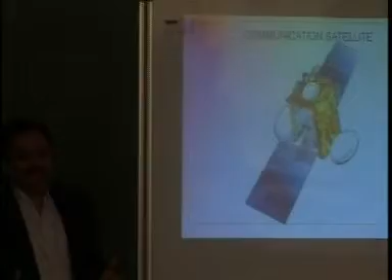Even when we say we have made the antenna very compact and very highly efficient, still the demand is so challenging that they want more, and they say don't put only 3, put 6, 8 like that, and it has been reality. Whatever I am saying is the reality. People are putting that.

Now antenna, when we talk, we say for all the frequency bands from UHF to Ka band currently ISRO is working on, and KU band, you are probably aware that we are working on DTH - everybody's house has one DTH antenna. UHF is for tactical purposes, even our defense people or sailors are using it.

And L band is for navigation, again the way I said, the GPS satellite - the L and S band is being used for that application. And they have their own merits and demerits in terms of their utilization.

Now another is the application - airborne application, ground terminal, remote sensing and communication - because the frequency spectrums are defined for these applications. The airborne application for SAR is already predefined. When they talk about high power radar, the signal power is so high compared to the level of signal which you receive in a communication system.

Can somebody answer how much power generally your DTH system in your house receives at the terminal, at the output where you are getting a low band signal? It's hardly, maybe... few milliwatts. Imagine - if somebody's radar is there in the same frequency band, its side lobe itself will be of the same or maybe more than this power.

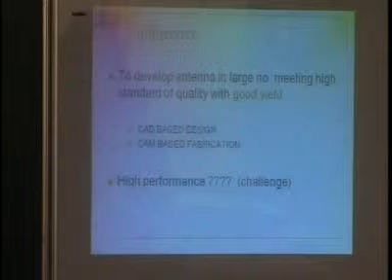And now I will talk about the design aspect first. Whenever a designer has to design any antenna, what is the prime thing he has to do? He has to use the CAD design tools which are available with him, or select them depending upon the application he is working on.

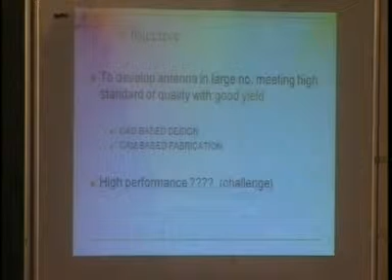And he has to meet a very high quality of yield. This means he should not go for any repeat failure, and the rejection should be as low as possible, and the cost of fabrication should be very low. Because if you have a very good design, it may meet the specification, but the mechanical fabrication can be so high, the tolerance requirement may be so high that the cost goes up.

So the designer's requirement is to design an antenna with high performance with low cost. Cost always comes into the picture. And high performance means what? This is the antenna design.

This is your condition going to become like this - if you're going to have low volume, low weight, you need to have low cost, low cross polarization. Everything should be best, and that's everybody's goal - shaped pattern, beam to beam isolation should be as low as possible. We should have multi-band, multi-frequency. So it should have all these performances, meeting all these performance requirements.

Then he has to compromise on what he should do and what he should not do.

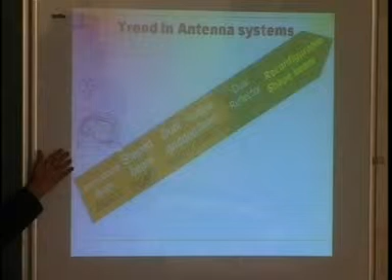Now I come to the next slide. What is the trend now? The trend is, you know all these requirements, and just for your quick reference, I put three different types of reference. Now these are the conventional antenna which we used to have earlier, unshaped beam. Then we moved to shaped beam. These are all reflector antenna - I am not talking about array, I am talking about reflector.

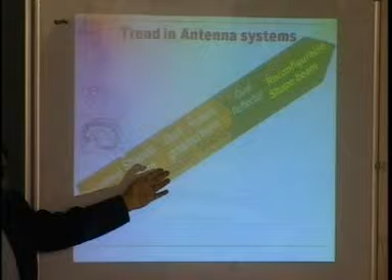Then we have dual gridded, which I will talk about a little later. The multiple beam which I was talking about, the EDUSAT type of program where we need to have more number of beams from a single antenna.

Then dual reflector technology, then reconfigurable shape. I want to reconfigure because the satellite life itself is a minimum of 8 to 10 years, and whatever requirement I have today may change after 5 years. So I should have adaptive reconfigurable antennas. That's how reconfigurable shaped beam antennas is still one topic we are working on. It can be achieved both by changing the reflector surface profile using smart material, or by using an adaptive array, which is well known but has its own problems.

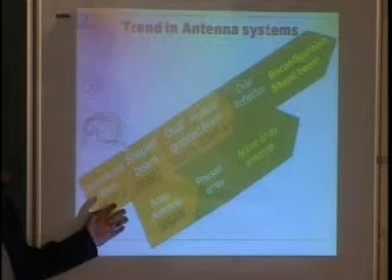Then we have array antenna, phased array antenna, and active array. Today these three are working hand in hand. During the radar era, people were more focused on reflectors, but today a balance is being struck between array antennas and reflector antennas. Why? Because technology for both low power and high power devices in a miniaturized size is now available, so we can use this for phased array applications.

Now comes the scanning beam. Sometimes we have a scanning beam requirement, where you want to scan the beam over an area, for example across your border areas. In terms of theta and phi, they are predefined, and you want to scan the beam at the rate the user wants. This type of requirement needs scanning beam antennas. For a ground station antenna, you would go for mechanical scanning, which is not easy to implement on a spacecraft, so you have to go for a different type of technology.

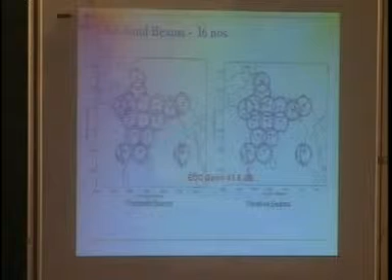So this is what I was telling you, the 16 beam is being planned for now. The advanced communication satellite is going to come up in another 2 years, where we are covering even Andaman, Maldives, and Lakshadweep. And this will be the scenario when we are talking about 16 beams.

Whenever we talk about any beam, we talk about its application in both transmit and receive. In each beam, both transmit and receive capabilities are there. And in each beam, you should be able to isolate one beam from another, because the user sitting here should not get interference from a signal overlapping from elsewhere.

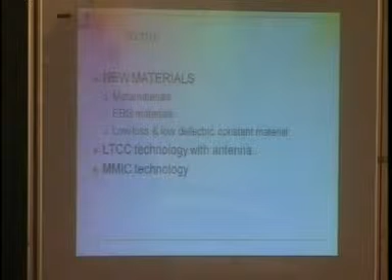Now what is the trend? This is just the need I told you about. The trend is, we know we need reflector technology, we need phased array technology, but there's a very important point which we've seen nationwide in our country: new materials have to be explored.

Why today are we talking about the Chandrayaan mission? Why are we talking about very costly satellite systems being sent for a moon mission? Because everybody is racing to explore new materials, which need to be lightweight, have more stress capability, the ability to withstand conditions, and low coefficient of temperature variation, since temperature variation in space is very high. All these qualities should be there.

And then we are talking about metamaterial, which has become a very important area where we are able to reduce the size of an antenna by changing its property. It's not a natural material; you do something to an existing material to change its property so you can use it for any application. And the most important application is antennas, where size is the biggest problem.

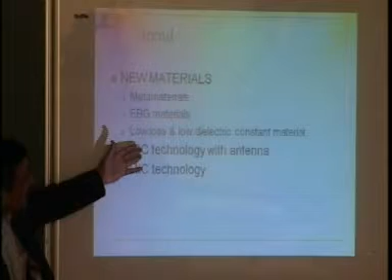Then EBG materials, and low loss, low dielectric constant materials. Even today, whatever material we use for our microwave integrated circuits, we are importing from the US. So we have to develop our own indigenous low dielectric materials equivalent to those being used elsewhere.

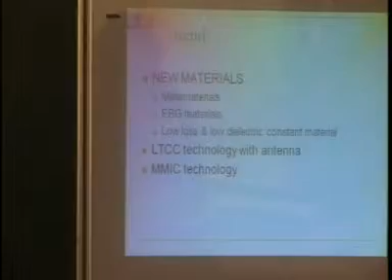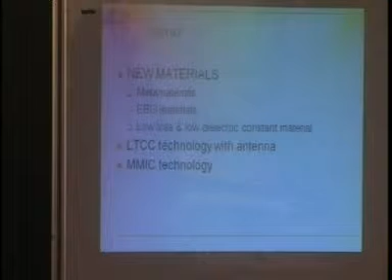And then LTCC technology with the antenna, where we need co-firing of different materials in a multi-layer configuration. It's a new technology. The most important use is when we are packaging the transmitter and receiver along with the antenna—then you need LTCC technology because you can integrate directly. Otherwise, the general conception is antenna here, transmitter here, receiver here, connected either through connectors or cables.

Now technology requires that your transmit and receive system should be in a multi-layer configuration, so that you get directly embedded in a single sandwich. You are having all the three together without any connector, without any cable.

Imagine if you have a phased array antenna system with suppose 200 elements. If one connector weighs 1 gram, you are having 200 grams. You have to minimize the connectors. As the array size goes up, the connectors, the cables, and testing of everything becomes really a headache. So this is the new technology which is coming up.

In India, we are establishing this in 2-3 places. One is Sriharikota and another is in Pune, C-MET, but still a lot of work has to be done. Whatever we are developing, these microfractals or metamaterials, they have to be worked with the technology where we are having high packaging density.

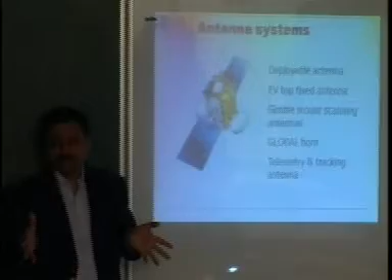There can be deployable antennas - any antenna can be deployed, because in telecommunication it becomes more important, since this whole antenna cuboid, the satellite has to be put into a launcher which has a particular volume. You cannot fly this at full size, so it has to be made compact and folded, and then it gets unfolded. The solar panel also gets unfolded there. That's why deployable antenna becomes all the more important.

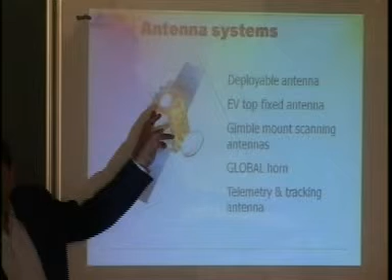And then EV top fixed antennas are there, on the top of this. EV means earth viewing - this top always looks towards the earth. That's why it's called earth viewing antenna, top fixed antenna.

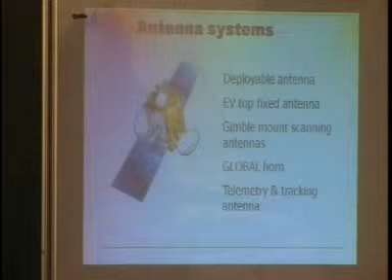Gimbal mount antenna. And then all these satellites, their health is being monitored by a control station always, to see what is happening in the satellite. One is satellite antennas looking towards the user, and the user is getting communication, whatever the application. But the health of the satellite is also very important - what is happening inside.

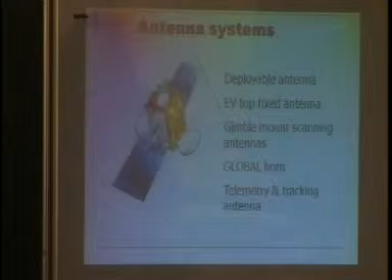So a lot of telemetry data is coming from the satellite to the ground, and accordingly they keep monitoring the temperature, its pitch, roll and yaw axis, whether it is a stabilized platform or it may tumble also. And it may give more errors, and you are wondering why the signal is not coming, and maybe it is looking towards some other region of the globe.

So the telemetry and tracking antennas are becoming very important today in today's world. Why? Because nobody wants to have any failure or loss of signal because of pointing accuracy or tracking accuracy. So tracking antennas are becoming very important nowadays.

Because if you have an antenna on an aircraft that is moving - thank God the satellite is stationary - but if your aircraft is moving, how will the aircraft have communication with the satellite? It can take any type of rotation, even 180 degrees, while it cannot keep its position fixed while moving along for its purpose. So tracking antenna becomes very important.

I will emphasize on that, then I am going to give you some highlights of what we have developed. So whatever I said in the last 20 minutes, these are the trends in the feed. You need high power, wide band, and multipolarized.

This is only dual polarized, multiple polarized. Then we need tracking. How many of you have read about monopulse tracking? I am sure you must have read in radars. Now for tracking, we know monopulse tracking, where 4 horns are being used. That is the old technology now.

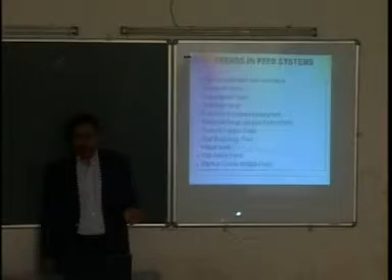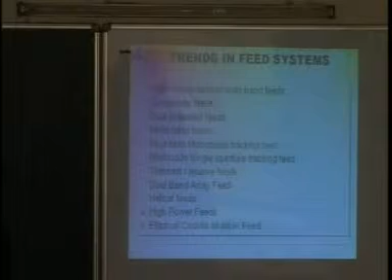People are now using a single aperture, higher order mode technique where they take care that the signal loss is very minimum, the tracking slope is very high, so that with minimum loss you are able to track.

Now, why should there be minimum loss? We always say that any device should have minimum loss. Efficiency should be better - power efficiency, device efficiency. No, not generalized - power efficiency is a different issue. That is what I am saying, loss is there.

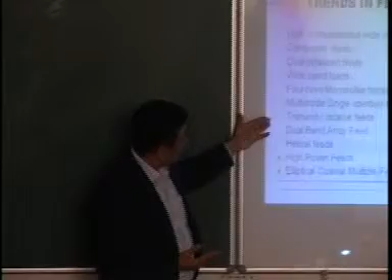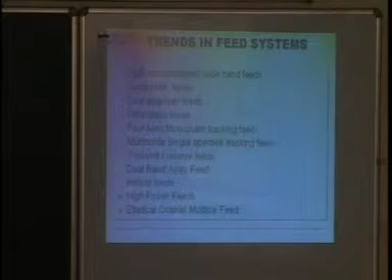Now, what can loss do? Loss means power dissipation. Mismatch is okay, but power dissipation means heat, so heat will be produced. That's the reason whenever we talk about high power feeds, the power dissipation has to be very low. Otherwise, when you have 4 kilowatt power and even 0.1 dB insertion loss, it is going to generate a lot of heat.

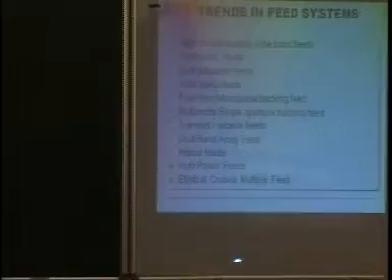Because the loss gets directly converted into heat. Even if my communication system may be able to afford it, I can pump more power, and for gain of antenna I can put a larger size antenna so that my losses are taken care of. But the heat dissipation becomes very important.

Similarly, in antenna systems also, you have different types of antennas. These are reflector antennas and these are what we call phased array antennas.

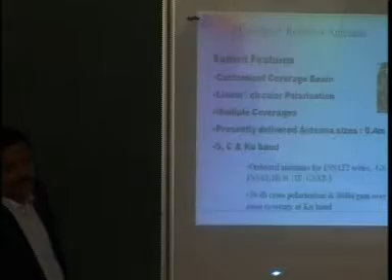Unshaped antenna I will not cover more because you are already aware of this. An unshaped antenna means a simple parabola with a feed, giving a circular beam, and wherever you cut it, you get a circularly shaped pattern - concentric circles.

So these are just to give you a glimpse: this is the reflector and these are the four arms, and these are the feeds kept here. You are illuminating the reflector with the feed and trying to see the efficiency of the reflector. You get around 55 to 60%. You cannot get more than that.

So these are the typical parameters. Generally we get 27 to 28 dB cross polarization. Now what do you mean by cross polarization?

If you want to send a signal in linear polarized form, suppose X polarized signal, the maximum signal should go into X polarization. Nothing should go into Y, which is orthogonal to X. So the minimum signal you send in the Y polarization is the cross polarization signal. Cross polarization should be as low as possible. Ultimately, conservation of energy is there.

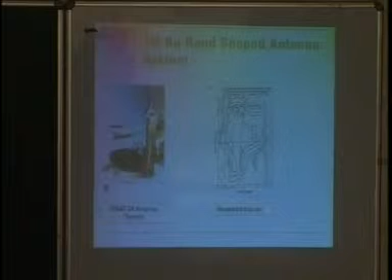These are the measured performance results - we have deliberately put these together. Tomorrow we will discuss how to measure this type of radiation pattern, how you measure it, and what challenges are there.

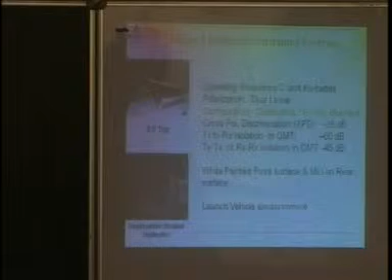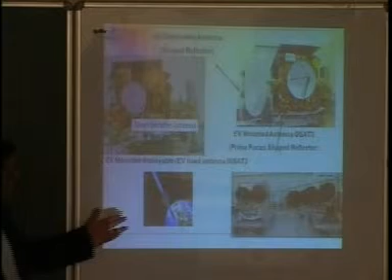Now, in the case of any satellite, you have multiple reflectors. Then you have to worry about these - like you see here, how many? 1, 2, 3, 4, 5... 8 antennas are there.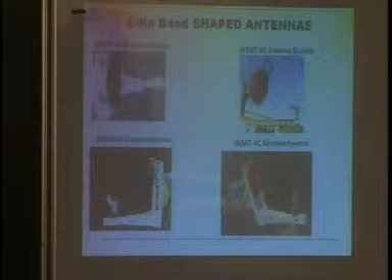Then this is one of our Insat-3 satellites where we have 2, 3 antennas. There can be any number of antennas, and each antenna has to meet specifications in isolation from other antennas, and when kept in that environment where multiple antennas are present, it again has to meet requirements, because there may be interference from adjoining antennas.

Now comes the dual gridded reflector. We have a problem of 30 dB cross polarization, 32, 33 and all that. This is why new technology has come in the reflector antenna system, where you are seeing 2 colors here. These are 2 reflectors placed one upon the other. But you may be wondering how communication can occur, because one is there on the back.

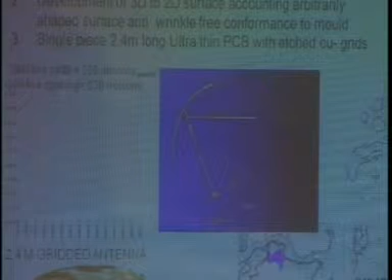The front reflector has grids, and it will allow only one polarization to get reflected, the other polarization gets transmitted through. So this front surface is acting like a polarization filter. That means the cross polarization is going to be very low, because if X gets reflected, the Y polarization is not going to get reflected. It will go and hit the back reflector, and the back reflector is going to reflect that signal.

An antenna designer can design it in such a way that the cross polarization of whatever comes from the back goes in some different direction, so it doesn't come into the region where you are interested. So this is a new technology where we are embedding 2 surfaces, 2 reflector surfaces, and the front shell is sensitive to one polarization, and the back shell is sensitive to the other polarization. So whatever you have seen till today is solid reflectors.

They are also solid, but the surface material used on the front is of different quality. It allows only one polarization to get through; for the other, it is blind, as if nothing is available there. This technology has given us the ability to fly the antenna with much better performance.

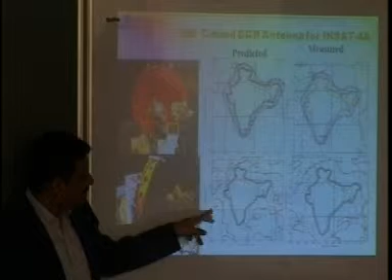These contours are 32 dB cross polarization. These are the cross polarization pattern over the Indian region. Now we are getting 32 dB cross polarization. Though the gain you are getting was whatever was specified, now you are getting improved cross polarization.

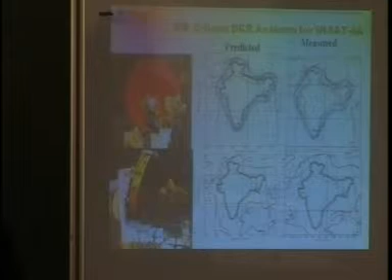Similarly, we have one for Ku band.

This has a relevance I will talk about tomorrow, but what I am trying to show here is that when your antenna is mounted on a spacecraft, you test the performance, and when it goes into satellite, we have to ensure whether the satellite antenna is giving the same radiation pattern or not. We have to measure it again and see these radiation patterns. These are the predicted ones, and this is what we are getting in the in-orbit performance. I will talk more tomorrow, but just to tell you that the accuracy required is of this order, then only one can go for any international quality commitment.

Then multiple spot beams, as I was talking, 5 beam, 16 beam and 32 beam, you need to generate various types of beams, 2, 4, 5, 6 from a single antenna. 5 beams are already there in INSAT, 2 beams were flown earlier in GSAT-1, and 8 beams are going to fly in the month of July in K band, where we are going to have 8 beams over the Indian region. And when you talk about 8 beams, that means 8 antennas, 8 transmit chains, 8 receive chains. Then the complexity, just see how many plumb lines and waveguides will be there.

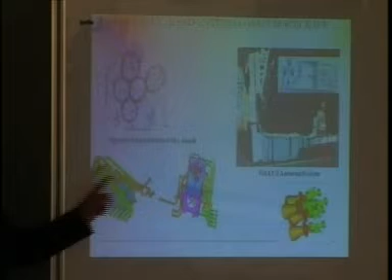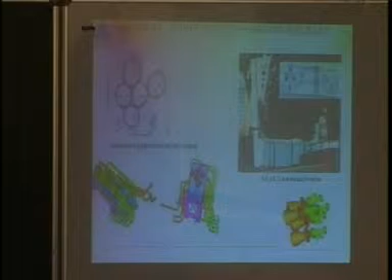These are the 8 feeds you see here. These are the 5 beams, for the example of GSAT 5, 1, 2, 3, 4, 5, and each is having a transmit and receive, so we get 10 waveguides, and the system becomes more and more complex, and each feed has to be located and positioned so that you get performance covering the Indian region.

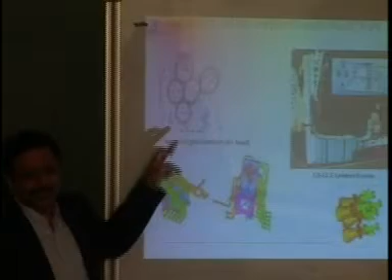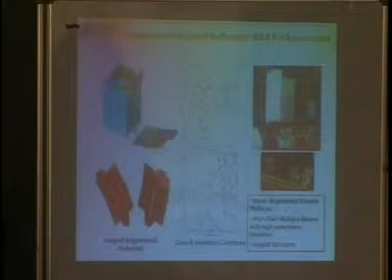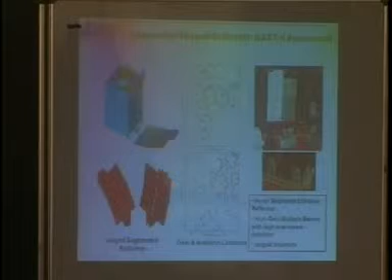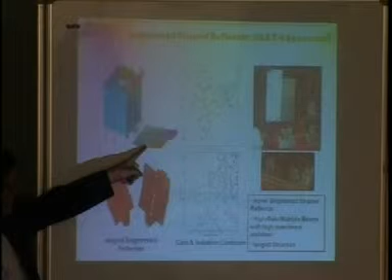Now these you saw earlier were the shaped and unshaped beams. Again, these are unshaped circular beams, you can say elliptical, with some ellipticity. But if you see here, these are shaped beams. They can have any number, as good as we try to see whether one state can be covered properly. If required, we can have nearly 18 to 20 or 25 beams, but some states like UP cannot be covered with a single beam. You have to have more beams. That is why the beams are sized as per our requirement. So here the reflectors are again shaped in such a way that you get shaped beams.

Here what we do is use physical optics and geometrical optics techniques. How many of you know Snell's law? I think everybody must be knowing. So Snell's law only is being followed here.

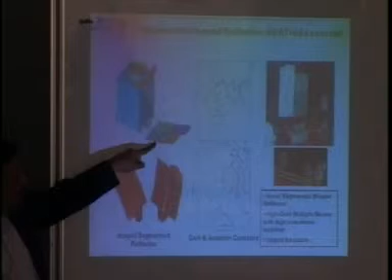Once any electromagnetic ray gets impinged on a reflector surface, which is a conductor, it has to follow Snell's law. The incident ray's angle and reflected angle have to be the same. So whatever rays are falling here, you have to see that they all stay in the same beam. They should not go outside the beam.

And then when we go into high frequency, we have to use diffraction techniques also, because edges of the reflector cause diffraction, and diffraction means your side lobes will go up.

Now when we talk about high gain antennas, everybody wants this because in ISRO we are planning a geo-based mobile communication system. Today you have a cell-based, terrestrial-based mobile system. Now we are planning for space-based. There you need a large antenna, because we are communicating through a 36,000 kilometer satellite, so the signals are going to be very weak. If we talk about 2, 3 or 4 meter, we have to go up to 6 meter antenna, or in future we are planning for 12 meter and 30 meter also. The antenna will be required to be put into the launcher.

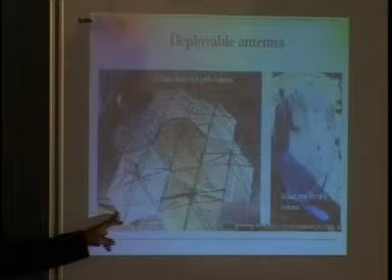And there are going to be 5 beams. Each of the 5 beams is going to be used for mobile communication. So this is how it will look when deployed, in a closer view in space. This is like a cloth, and that cloth is nothing but a metallic mesh which should be able to follow your Snell's law again.

Then there are other new concepts coming, which are inflatable antennas. Inflatable antennas means they get inflated when they go up, and then the surface forms. Anybody familiar with the reflect array? No? Okay.

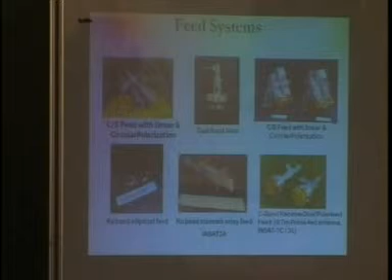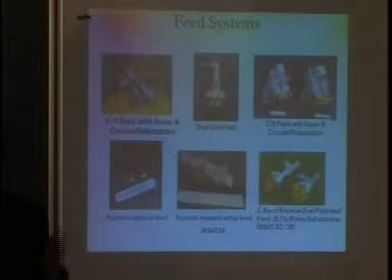I'll go to the feed systems now. I have probably used the word feed and antenna feed system many times, but feed is nothing but that which illuminates the reflector. Now this feed has, as I said, multipolarization, wide bandwidth, and low cross polarization requirements also apply to these feeds, and they are basically your two-wire transmission.

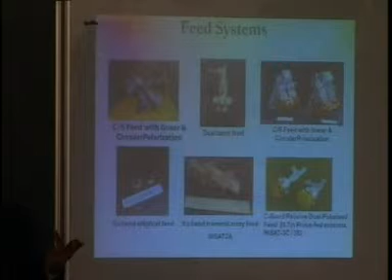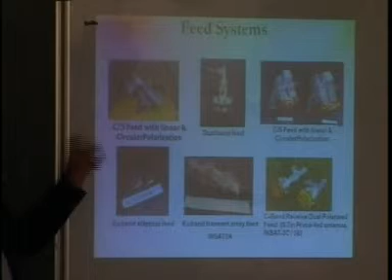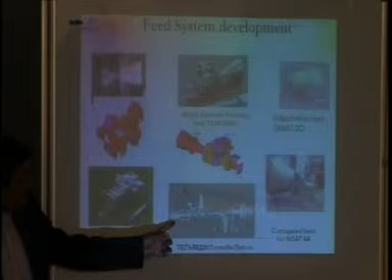Okay, now this is a 4-horn at Ka band. This is the onboard multi-mode tracking feed for Ka band, where you need to generate a very difference pattern in azimuth and elevation with a large null depth greater than 38 dB. So this is the one I was talking about, this multi-mode feed, where you see how complex it becomes.

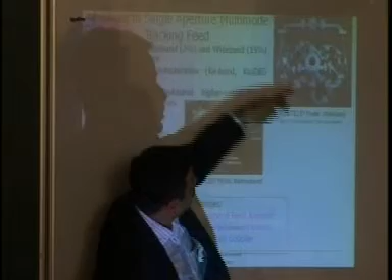In the case of multi-mode, you have seen, you all have read about hybrid magic T in your BE engineering or graduation. See how nicely the concept has been used here. At each point is the magic T - 1, 2, then 3rd, 4th, there are 8 of them. These are basically nothing but, the way you add in your microstrip line, you make use of a hybrid magic T, hybrid coupler, or Wilkinson power divider or adder. Same way in waveguide you can use a magic T or a waveguide combiner.

Then one can easily extract, not the dominant mode TE11, one can extract the TE21 and TE21 star mode, which are available in the waveguide. You extract that and add them together, and then you get a very nice pattern, because TE21 has a property that it gives a null in the center. So we use this property to generate the azimuth and elevation error. These are single aperture multimode feeds, and though it becomes complex, the added feature is it has many attractions.

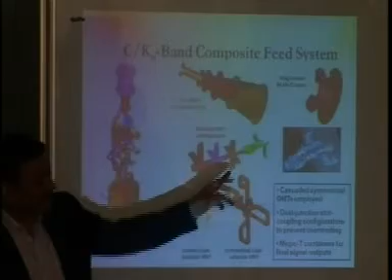So these are just for showing the different multiplexing systems and feeds. Then these are, I was talking about, multi-band, multi-frequency antenna feed systems. Each band is separated like this, like a multiplexing network. You have 4 ports, and each port has its own frequency. You have to separate and transmit 5 gigahertz, 8 gigahertz, 12 gigahertz, and 15 gigahertz.

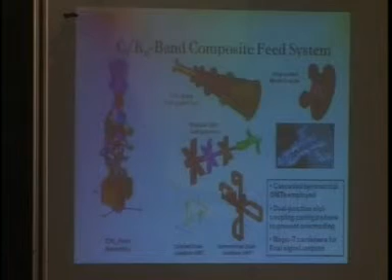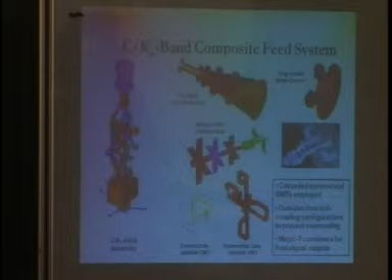So all 4 signals have to be multiplexed from a single multiplexing system. And when you put two together, see how complex it looks. But for a designer who has designed it, it is only again a combination of waveguides, different passive components, and different modes which he can visualize when designing the reflector.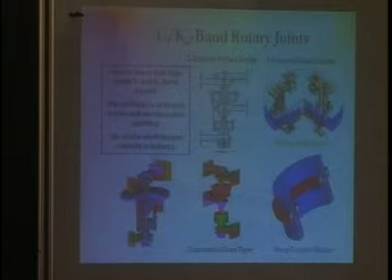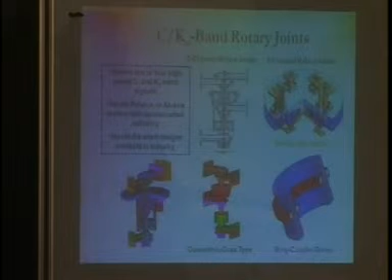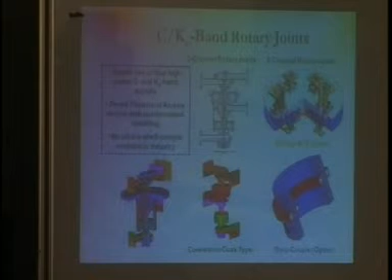These are rotary joints which are generally used for all your communication, each earth station, whenever it needs. Earlier days we used to have only single channel rotary joints. Now when the requirement comes for a multi-polarization and multi-feed, multi-frequency antenna system, you have to have multi-polarization, multi-frequency rotary joints too. So C and Ku band rotary joints is another requirement which has come up. We have developed that, so it becomes 4-axis or 8-axis. As the requirement goes up, this may become more and more complex.

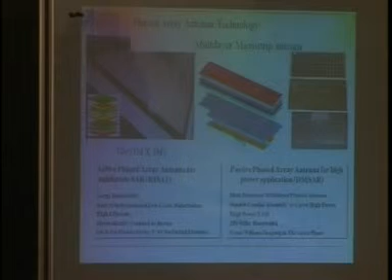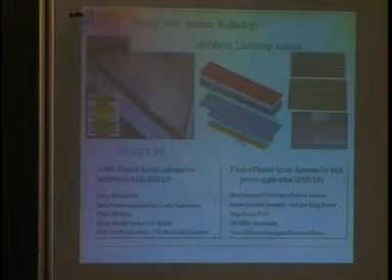Now this is the one which many of you may be aware of, the phased array antenna technology. When we talk about various types of configuration, like your stacked patch and all that configuration, we have patches on the upper layer and power combiner at the lower layer. So this is the one we are using for our synthetic aperture radar technology.

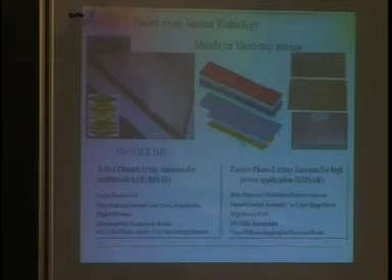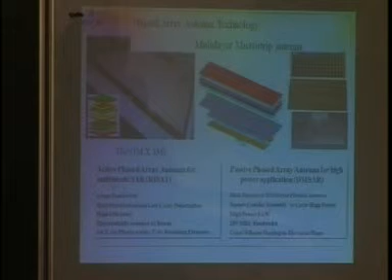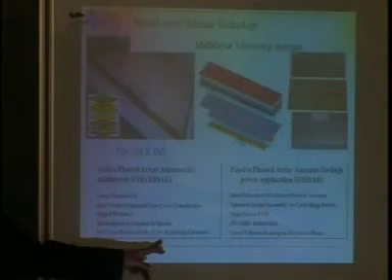Where we are using active phased array and making a 2 meter by 6 meter antenna, which gets unfolded into space and has a high power requirement and large scanning. Wherever we need a scanning antenna, it is preferable to go into a phased array, because it is not possible to mechanically move and scan a 6 by 2 meter, the 12 meter area, antenna. So there you see, 5760 elements are there, so many radiators are there. Active phase elements and amplitude variation is there, and then you are able to generate 41 beams out of a single antenna.

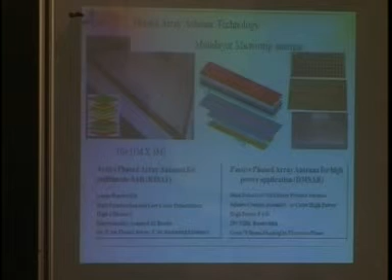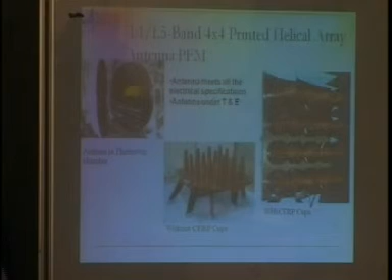Then we talk about array. Why talk about only patches? It can be an array of anything - array of even reflectors, array of even your helical antennas. These are nothing but a helix, which you must have seen in your labs also. So these are being used for our navigation satellite, which is getting launched next, in the second quarter of this year. So array can be used for any concept.

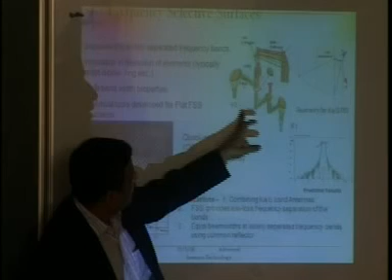Now another one which you saw earlier - frequency. I said the number of frequencies required. The only way I showed you earlier was to separate the frequency from the waveguide. But this can also be done by using a number of mirrors. You see here, this is a signal which can be... you see now the green color has gone to the second reflector, and so there are 3 frequency feeds: F1, F2, F1, F2, and F3 also. So these 3 feeds, having different frequencies, can be separated by using mirrors.

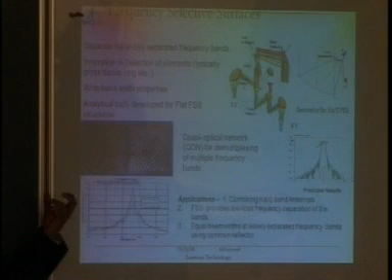The way I told you, gridded reflectors are polarization sensitive. Here, each surface is frequency sensitive. Because of this property, one can separate the frequencies of each band, and this is how the surface looks - basically a periodic array of a number of dipoles, each acting as a resonator. Because of this resonance behavior, one can get its own frequency selective surfaces.